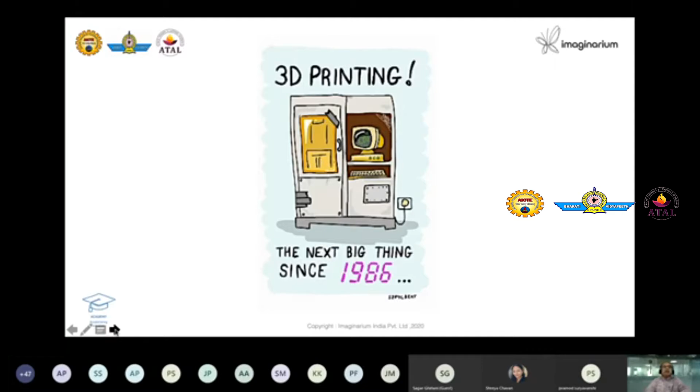So 3D printing, as you know, has been around for a long time. People keep calling it the next big thing since 1986 - it's an irony, right? And why is that so? That's because of some factors I've listed here: 3D printing is costly, you need a 3D file to print anything, it is time consuming, there are limited materials, and it always needs post processing. You cannot just 3D print and start using it. Many people say it is only good to make prototypes. These were somehow the reasons why people were not adopting 3D printing, and in a way, there is some truth in this.

But what you'll see in this presentation are case studies which will start changing these perceptions. When you say it's costly, you'll learn that it's not so costly. A 3D printing file is of course required, but people now have an ecosystem that supports this. Time consuming is also getting overcome - we are going to have technologies which are much faster. Limited materials were probably once upon a time the case, but today we have more than 600 materials to offer, not just from Imaginarium but generally available, including specialized materials. Post processing is something that is always there, which you cannot escape, so it is required. Today, we are happy to say that we are making end-user parts - it's no more only used for prototypes.

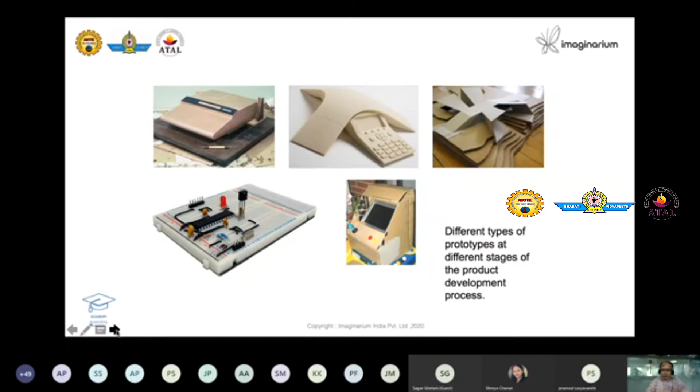People have been making prototypes using various ways, but that needed a lot of skill. In order to make these, you need to have hand skills. So many times you had to depend on somebody, an artist or a model maker, to help you out. Today, if you are able to generate a model on computer, no need to wait and request anybody. You just give it to a robot called a 3D printer, and that will take care of it, isn't it?

With the fast digitization happening in the manufacturing sector, we are looking at various ways the world is changing today. So we have seen industrial revolutions 1, 2, 3. And at the end of the third industrial revolution, 3D printing was born. Now we are stepping into industrial revolution 4, which is a very different kind of thing, we'll come back to it, but we are already moving towards industrial revolution 4. We call it industry 4.0.

3D printing brings the possibility of creating an object directly from a virtual model, and that is the beauty. Whatever you make right, it is produced. You make it wrong, it is also reproduced, faithfully. And that is the beauty of what you've been learning for the last 4 days about this technology, and this is what it offers.

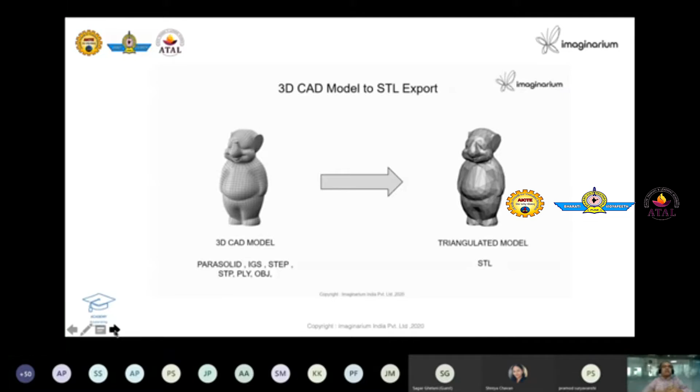We all know, if you have an idea, this idea as a sketch has to be modeled on a computer with a wireframe and all. Then you have to triangulate that model, and then you can give it to a 3D printer which prints it. A lot of file translations you have to do. You have to slice it, and 3D printing is that process in which the slices that are done are put back together, and what you get is the physical object.

And this is done using a 3D printer. What exactly will it do? It will put back the layers faithfully in a sequence in order to build the object that is desired.

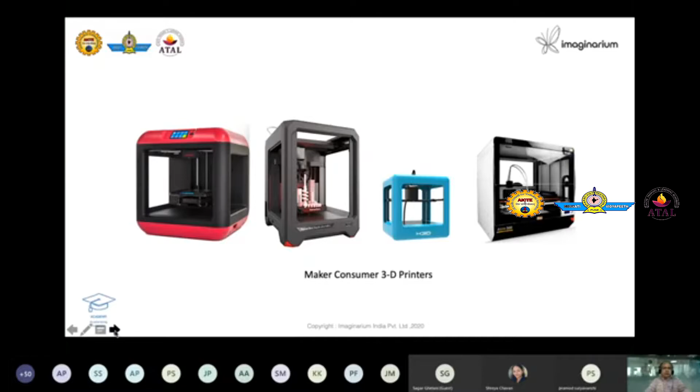Today you have a lot of small machines, big machines. This technology, particularly FDM, has become open source now. Your students can build, you can build. So we have a lot of machines today available, both internationally and in the local markets. And if we look at the whole spectrum of opportunity, first of all, 3D printing cannot be topped off without an idea.

So the idea is very important. Without an idea, what are you going to print? This idea has to be translated into a CAD model. For the CAD model, you have reverse engineering coming from the top, and also you need to have some knowledge of DFAM, design for additive manufacturing, because it is a new way of making things.

After having done the CAD, you have to export the file, and in various file formats, you have to process it, that is slicing and all. Then only 3D printing starts. Now, coming to 3D printing, it also needs material, and it needs a lot of care, that is maintenance. If you don't maintain them, they kind of don't work, so they need a lot of love and care.

Then, of course, you have post processing. What is post processing? It is like cleaning, painting, sanding, electroplating, for example in some cases, all of them, pigmenting. So these are all the post processing you can do. With this, what you have is a world of opportunity. You can think of anything, and even you can do unthinkable things. Let us come to that later.

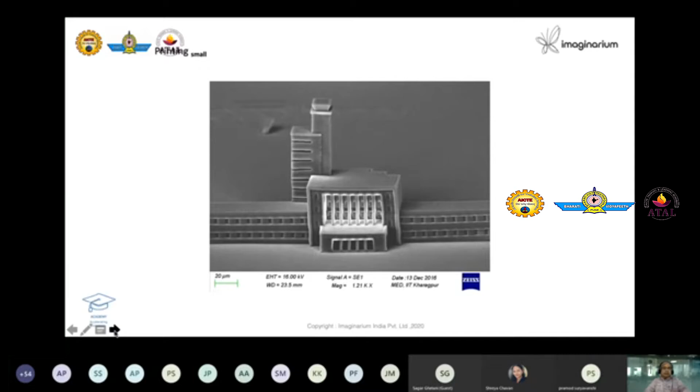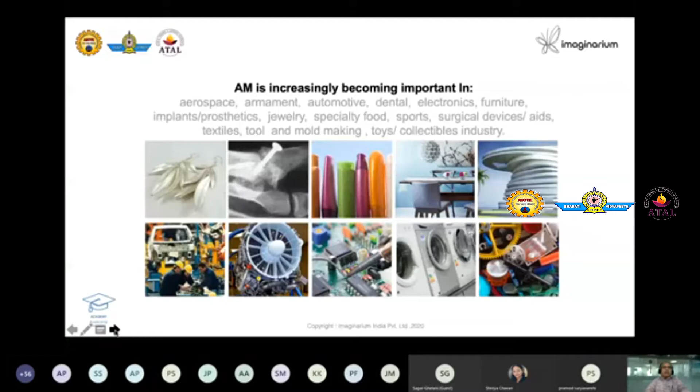Today, AM is making deep inroads into various industries such as aerospace, armament, automotive, dental, electronics, furniture, implants, prosthetics, jewelry, food, sports, and various other things. This is only limited by your imagination. It can enter into any field.

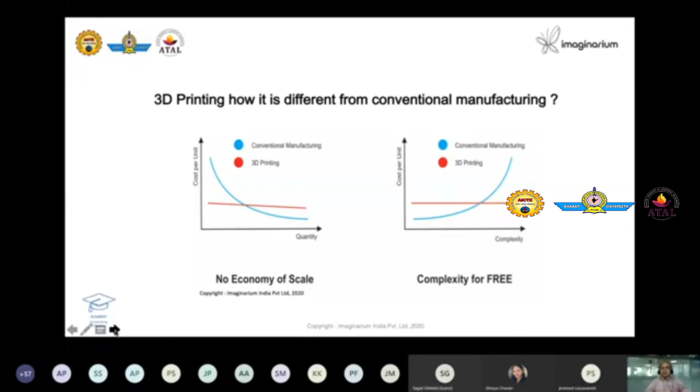People say there are two things which are spoken about when you speak about 3D printing's capability: there is no economy of scale, and complexity comes for free. So let us see through a small example.

On the other hand, in 3D printing or additive manufacturing, the part is built layer by layer and it doesn't follow the conventional way of setting. In one single setup, you can do all the things: knurling, milling of a square, and turning of round, all without requiring any fixture. So it is like toolless manufacturing.

You can see here the complexity - no matter how much the complexity, the cost curve remains steady. It is a horizontal line because it doesn't demand any extra wastage or incur any extra cost. And what is happening to the wastage? It is not much, because you're adding material. So I think these are very important aspects when we go into the application areas.

Now, coming to the world of important applications, I can think of many of them, but predominantly, if you prioritize, we have six of them. They are part consolidation. What is meant by part consolidation? In earlier days, we used to have a box.

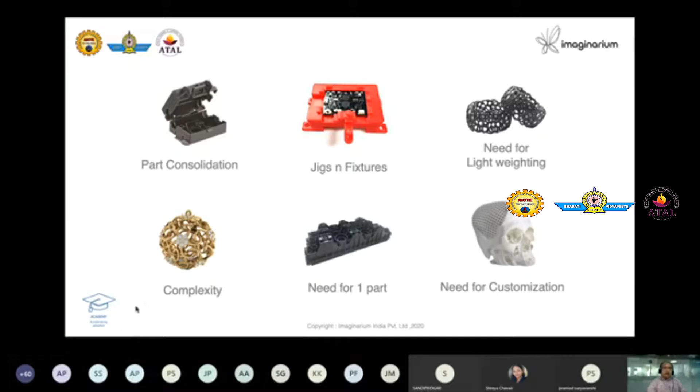Moving forward, we have one example here - GE's LEAP engine fuel nozzle. You can see part consolidation here, from 20 parts to one part, because of which the reliability is increased by 5 times. Weight has reduced by 25%, and it has become more cost effective, 30% more cost effective.

And whenever we require, we can print this on demand. You just have a digital model of this, keep it, so that doesn't require any inventory carrying cost. So you're able to save on the inventory cost. This is kind of giving a great message to the world - these are the capabilities, please adopt additive manufacturing.

Let us call a spade a spade - 3D printing was born for making prototypes. So you can see some of these prototypes even today. World's largest consumption for 3D printing has been in new product development, in making prototypes, in research, in understanding things. So take any sector - this is one of the main areas where 3D printing plays an important role.

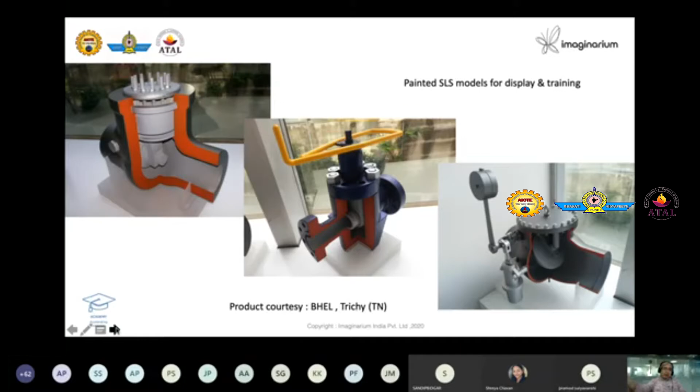But wherever you have the facility, you can print it. And that is also why people have transported a 3D printer to space, in the International Space Station. They are keeping 3D printers today - if they have any problem to fix, they can just transmit a digital model, and that digital model gets printed over there. There are other case studies like this one.

This is an engine block which used to take 300 days - from drawing to carpenter carving it to core box creation. It used to take 10 months straight.

Today, in 4 days, this can be made available. So this is a wax model. After checking, it can go for casting directly to get an engine block, and that's a phenomenal saving of time. Many people don't know about this. This is made up of nylon, done by sintering. We infiltrate wax into it, and after the wax is infiltrated, the whole part is 80% wax and 20% nylon, and it can be burnt out, and you can pour anything in this.

So such is the beauty of this. We are going to study many case studies now before we see the factory. Since you're all from institutions, I am showing this. These are all made for Formula Car students' projects.

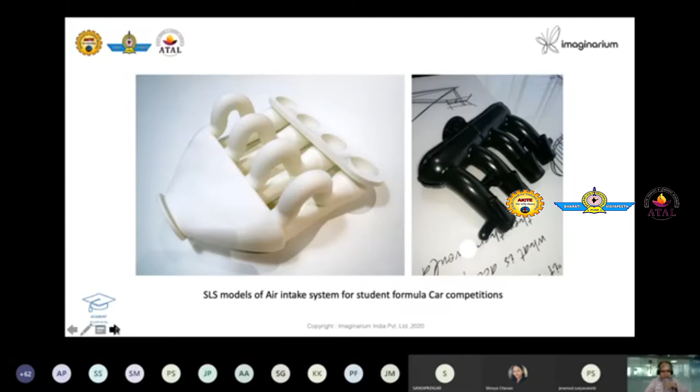These are some products which are not made in large numbers. They are IoT devices, made for a company for 10, 20, 30, hundreds only. They test and then go for bulk, they'll go for tooling and all. So we are able to do this much faster thanks to the technology.

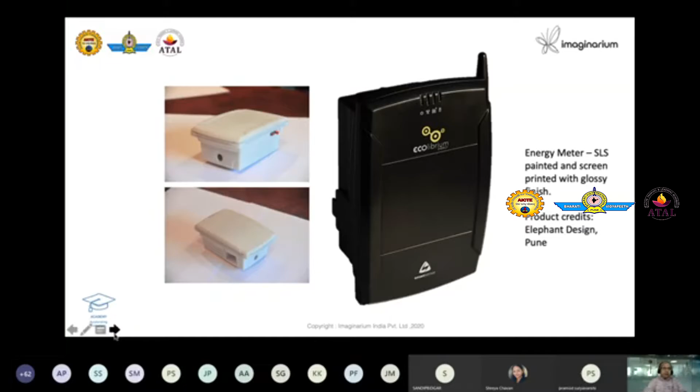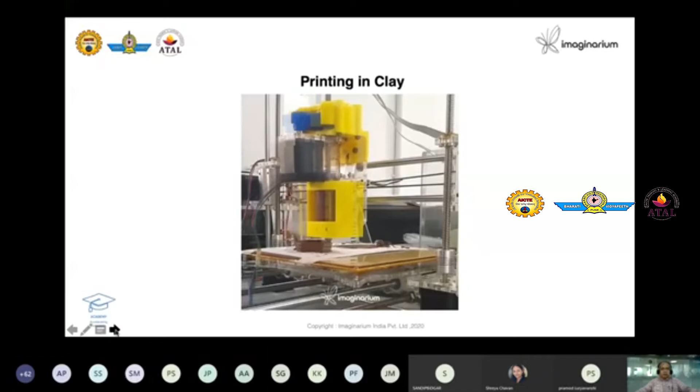We also tried making a clay printer, so these are some of our own R&D - clay, ceramic, and food. These are all the things we have tried. This will kind of open up our horizon to offer services to various things, such as these.

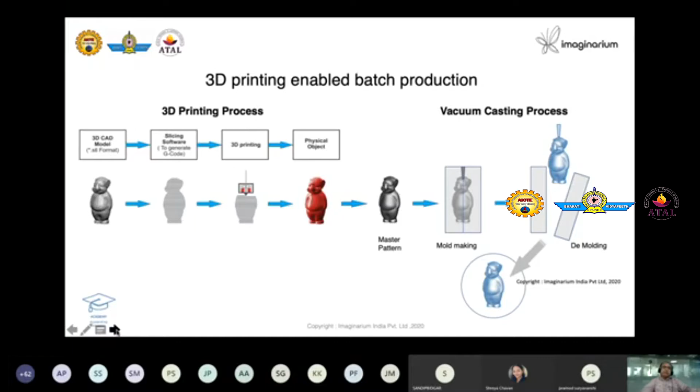We can also do 3D print enabled molding for small batch quantities. After 3D printing is done, you make a master, and that master you put into a mold, a silicone mold, and then you cut it open. You get a cavity which can behave like a mold for the production of a small batch quantity. So we are able to do transparent things, opaque things, things with different hardness, from 10 or 15 shore hardness to 90 shore hardness. We can have rubber-like objects also from this technology.

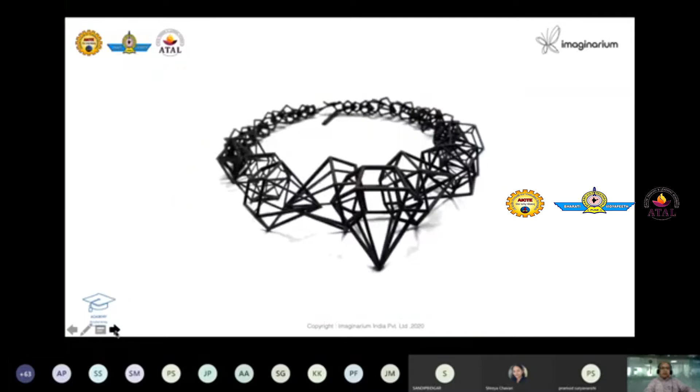You can see the jewelry is no more just a piece of gold. It can have fun, you're wearing a statement. You can see how beautifully people are able to visualize, conceptualize, and then make it. And it opens up a whole lot of things - you can see here the fluidity of the cloth is captured.

If we really look at it, you need a new design thinking. We need to go for customization as far as possible - then 3D printing becomes a real value add. Need for small batch quantity, even one part, is another opportunity. And optimization of structures and parts can be done using 3D printing. You can actually think of a value delivery - it's not about just product delivery, but value delivery that happens.

Design will lead the consumption, manufacturing would be taken for granted. Who worries about whether something is 3D printed or not? People want to enjoy products and services, that's it, right? And the future of 3D printing is going beyond prototyping to end user parts. In fact, as we discussed, we are making a lot of functional parts which will go for end user application.

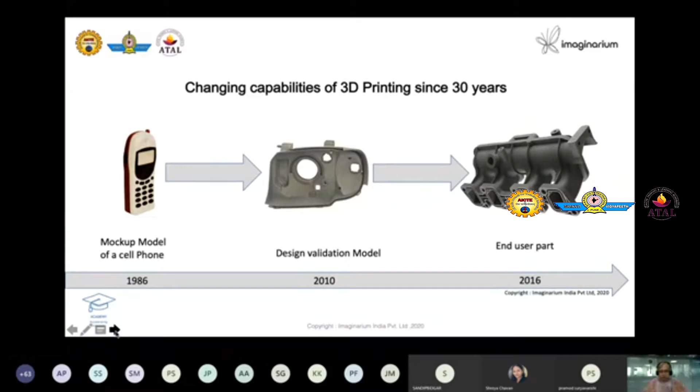So the journey goes on, the technologies are becoming cheaper and better, and more material is at your disposal. The ecosystem on the whole is really improving now. You can see some technologies like multi-jet fusion brought by HP, Hewlett Packard, that show a lot of promise.

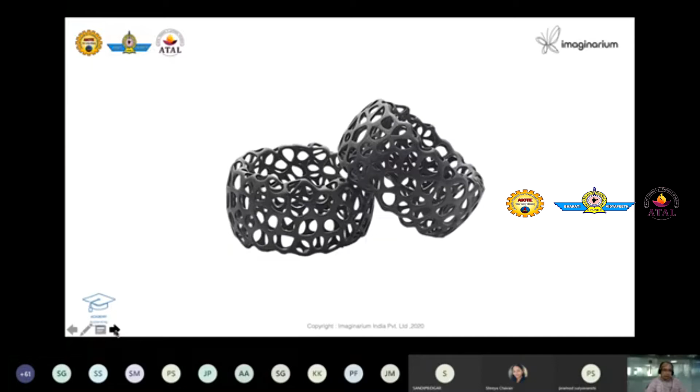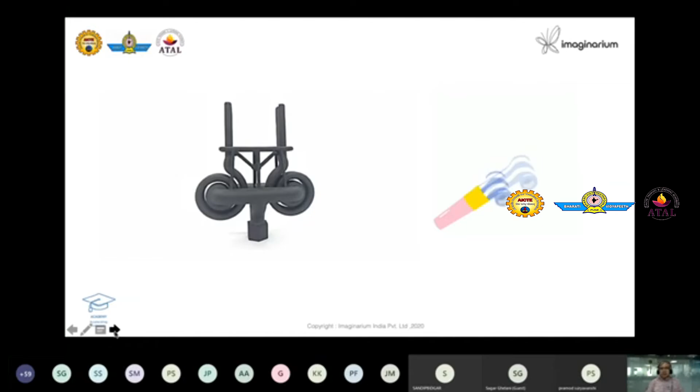I'm showing the blower which is used in birthday parties - that's how this works. Let us see the working of this. You can see the pneumatic system brings the compressed air, and that deforms, and the tongs come and close.

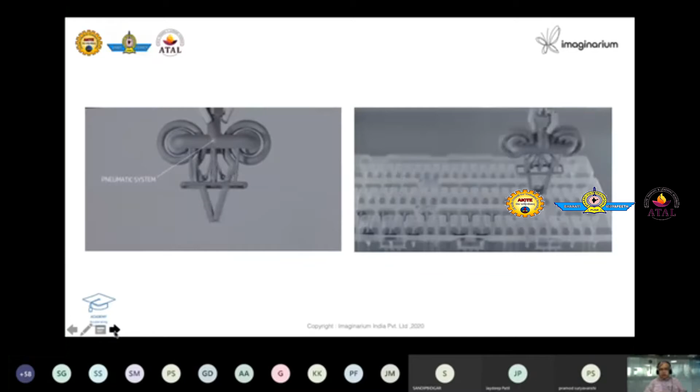You can see the application, how parts are lifted and transported from one row to another. So these are some of the compliant mechanisms. I will not go deep into the details, but these are some of the best adopted using this technology. People create things which will last forever - the part you see here will live for a very long time because the number of parts is just one. The whole part, though there is a mechanism which is working, the beauty is it has just one part count.

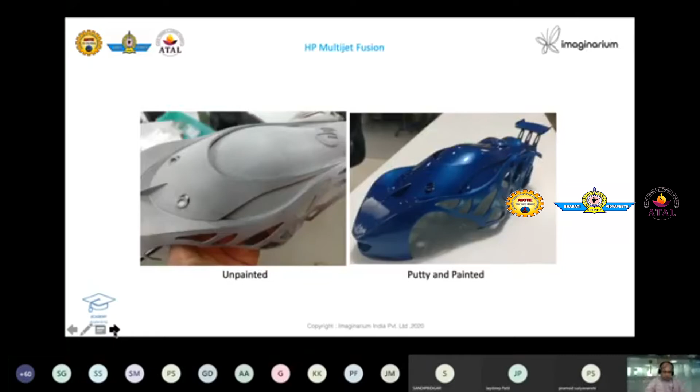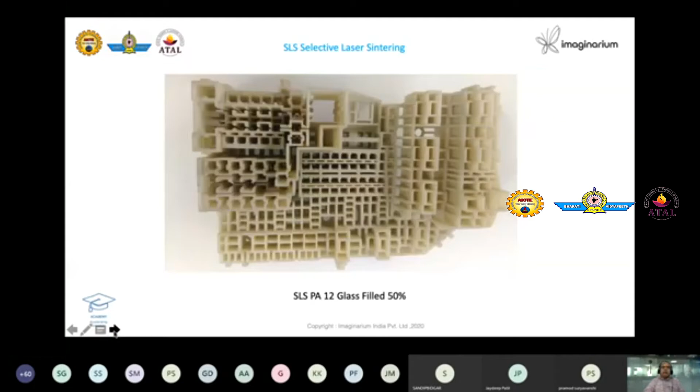So we do a lot of projects with automotive - you can see some of the automotive products. This was a pattern, impellers and all. And here you have a complex part which is done using SLS - these are all made up of glass filled nylon. These are dielectric parts for the electrical industry. Here again, a bevel gear part is made in small quantities, and the option was only 3D printing.

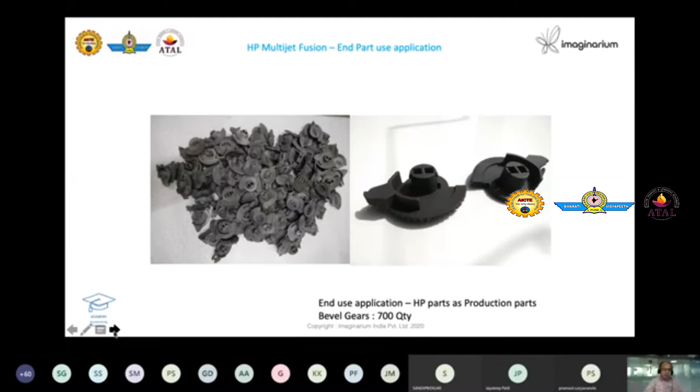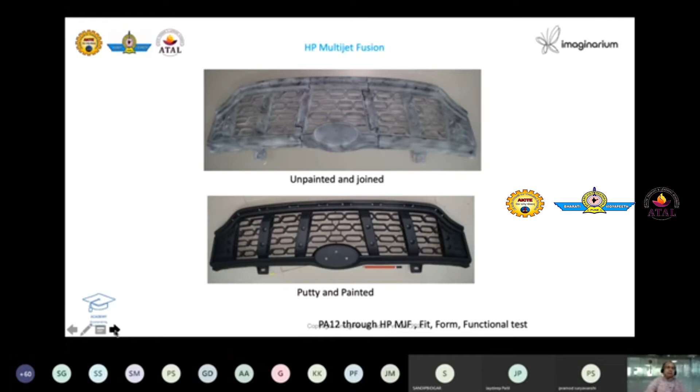So these are some of the other materials we have been using. Nylon PA6 can be directly sintered, and it gives very good engineering plastic parts.

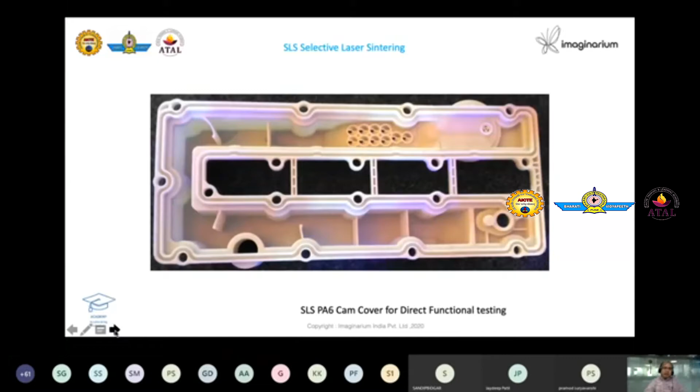This is an SLS part. Of course, it's quite a huge part, and some 12 or 24 pieces are put together to make a large part which is required. You can see here some of these are mirror optics, mirrors for automotive systems, which can be printed and then plated or metallized.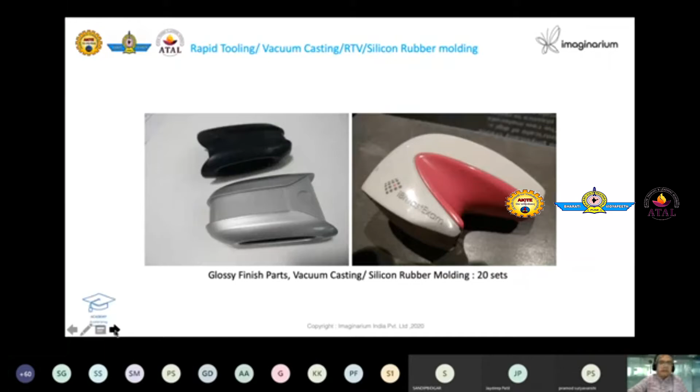You can see here some of the automotive things printed and then converted into silicon molds to produce batch quantity. So these are all indirectly produced using 3D printing.

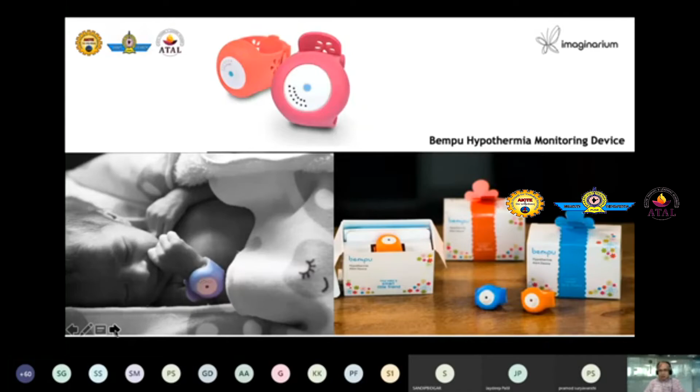This is a BEMPU hypothermia monitoring device, an idea that came to us from the startup BEMPU from Bangalore. We could create this skin-friendly, infant skin-friendly material for the band, which was vacuum cast. Today they're able to make a lot of it, and they're saving a lot of children.

In medical opportunity, whatever X-rays you take, it's normally CT is a set of slices. So people thought, why can't we use it for 3D printing? Because 3D printing also is built layer by layer.

So using some medical image protocol like DICOM, it can be imported into a software wherein we can stack them in a sequence and we can get back the anatomy. So that is the potential this opened up.

And today we have medical opportunities spreading to 5 different levels. At the first level, you have devices. At the second level, anatomical models. At the third level, you have guides and fixtures required for the patient, and then implants. And at the fifth level, you have printing of organs.

So printing of organs happens at different levels - on a petri dish, people grow something and they graft it and use it. Today this is still going on in labs all over the world, and people are not quite able to do the vascularization, and that's what is holding back the last stage.

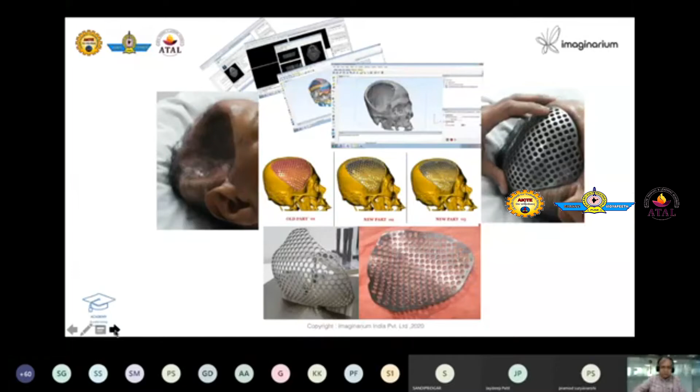There's a teacher called Darshana ji, and there's a movie on this particular thing - she also got a cranial plate, and it is a very good representation of how technology can change our lives, change the quality of life, and improve and save lives.

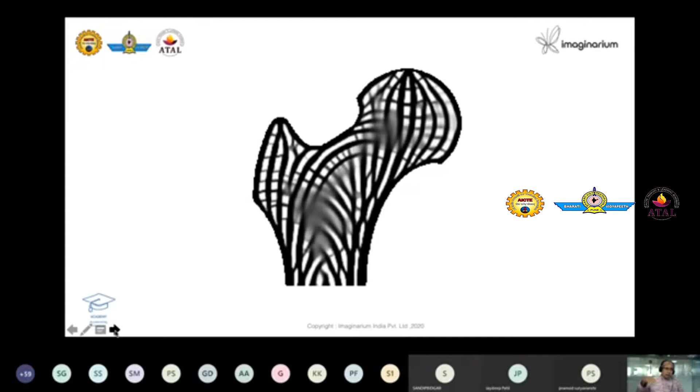You can see this is a human bone - if you cut them, you see a lot of porosity inside. These are called functionally graded materials. Because in 3D printing, you have control over every layer, you can play with it and get any complex structure made.

Now coming to the COVID time, we all know COVID brought up some of the strong points of additive manufacturing, such as conceptualizing, making quick prototypes, and then launching it. All these are very much part of the present crisis.

And I'm able to reach all of you by this virtual means because of the one thing that is COVID. So in some sense, we should thank COVID because it has brought in digitization much earlier than what was earlier thought of.

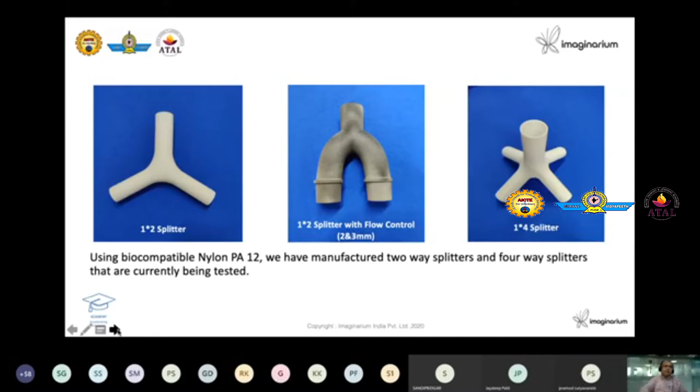These are splitters for ventilators that were made on call by doctors, and it was very effective that they were used, actually with the systems to check the efficacy and then also possible reuse on the patients.

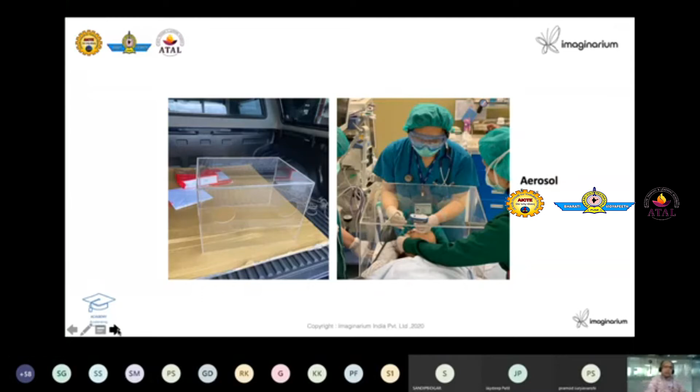The Venturi valve again, printed for healthcare. You can see here, aerosol box is a fabricated one, and it is a kind of control volume, when you have mass and heat transfer, you have a control volume. Same way, here, this constitutes a kind of boundary for heat exchange.

That is very important. You can see here some of the devices which people have been making, surgical mask to relieve some of the pressure. They have built a small thing. The beauty of 3D printing is you have an idea, it can be made into an artifact quickly.

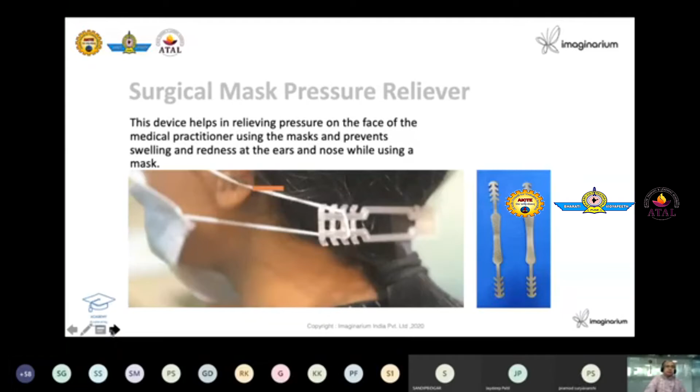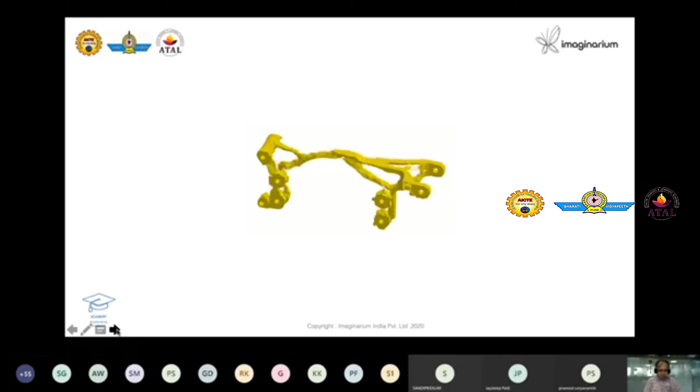Same way in buildings also, people use a lot of parametric designs, lightweight, which are 3D printed, that can be deployed on big, large facades. So if the sun is there, it's too bright, you can close it. If sun is not there, it is too dark, you can open all of them. Something like that is a possibility.

The future of 3D printing is hardware and software. Material and software will keep growing, in order to move from a physical factory to a cloud factory. Very important. You can see material, the hardware will become like generic, like generic drugs.

Hardware will be treated like a screwdriver. You don't study screwdriver now. As a mechanical engineer, do you study screwdriver? No. So same way here, 3D printer in the future, people will probably not study because who cares? I'm interested in the end part, something like that.

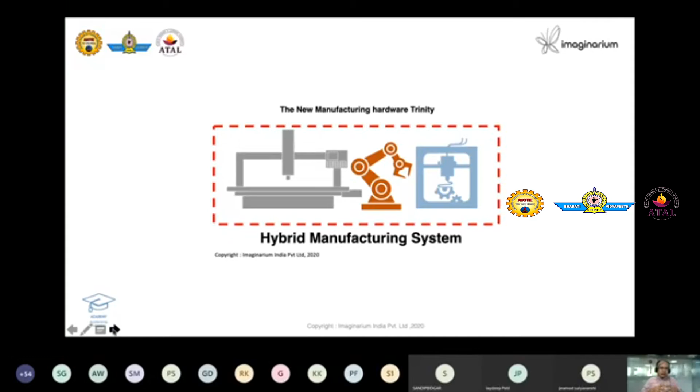In future, there is going to be hybrid manufacturing, wherein the CNC strength, additive manufacturing strength, and robotic strength are combined together to get a kind of solution. These guys are going to have it, we're going to see. You can see additive manufacturing or 3D printing is an important player in Industry 4.0, which brings the physicality to cyber physical systems.

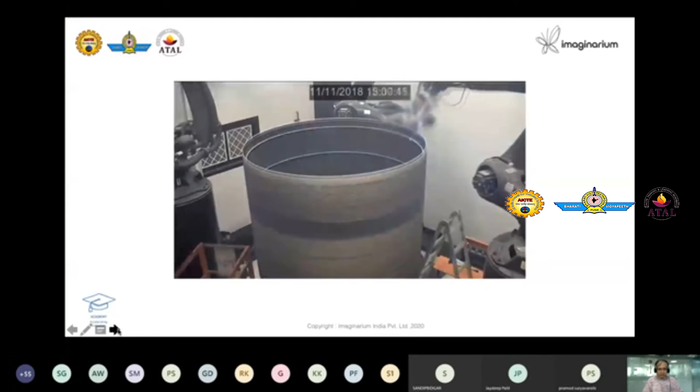You can see here from SpaceX, competitor Relativity. I'm sorry, Relativity made this part, and you can see the complexity, the size, the accuracy, all that.

Now, in this, it's very important to learn where exactly 3D printing actually lies, before we go into virtual reality, virtual tour. I would like to have this last slide wherein you have the 3D printing, which is something that delivers complexity. You can see volume wise it is very poor.

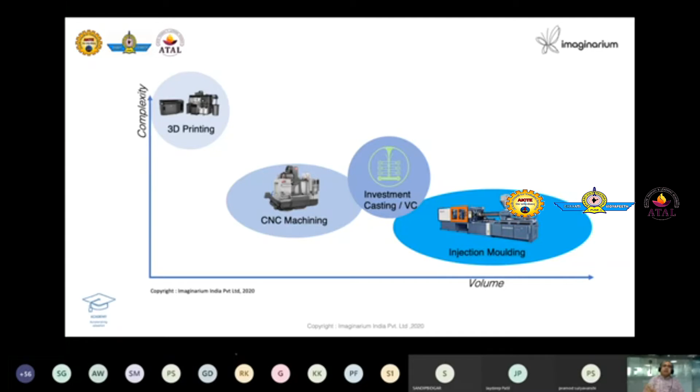Injection molding will remain as a high volume production methodology. 3D printing will remain as a complexity producing technology. I cannot possibly print a washer. Why do I need it? Because the conventional method is good, it fetches you a washer very easily. Whereas if you go for 3D printing a washer, it's a very wrong way of utilizing its strength. So please understand, 3D printing should be used mostly for complexity.

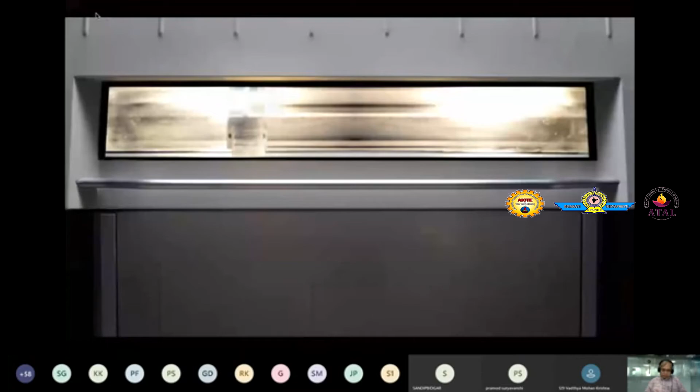Why even try and make the impossible? Because there's never been a more exciting time to be alive, to imagine, to create, to change things, to build better objects, better ideas, better businesses, better lives, even a better world. The India of yesterday was of cheap labor and efficient manufacturing. Our dream is an India of tomorrow, which is of creativity and design. Imaginarium is our way of helping unlock the creative talent of our country.

3D printing is a set of different technologies that allow the creation of objects by deposition of material layer by layer. This approach to manufacture objects has enabled bringing fragile ideas to reality quicker than ever before. Today, 3D printing technology has become a very powerful tool in the medical domain, for medical device innovation to surgery planning.

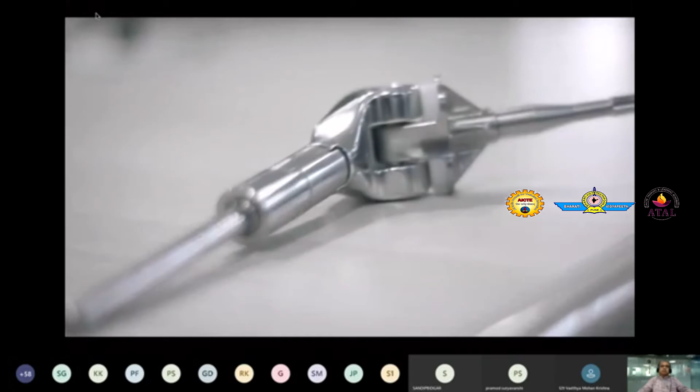We create the solution in CAD first. Doctors want to be able to see it in 3 dimensions to check the design form, fit, and function, and then give us their feedback. Using that feedback, we are able to reiterate, change the design, and make new models. This whole cycle time is compressed to a few days instead of few weeks and months. Previously considered impossible designs are now being realized every single day in huge numbers all over the world.

And now it has come to a stage where we can have desktop machines. It's almost become a home craft to make rapid prototypes. It's going to rewrite total manufacturing engineering and all our manufacturing processes. What we are talking about, assembly of many parts, the whole thing will change. Yesterday's science fiction is today's innovation and tomorrow's way of life. Converting digital bits into atoms and atoms back into bits is now a click of a button. And here we are at Imaginarium, bringing this next industrial revolution to the desk of every inventor, designer, tinkerer, and artist.

There are only a few technologies that change the way the world runs. Every single day, in every single way, we are reimagining the world and its businesses. We are collaborating with them to achieve their greatness. Just in a matter of hours, you can have your imagination, your dreams, your blueprints right in your hands. Because we believe the world's best ideas need its best builders. Imaginarium is the oxygen that brings these ideas to life. And with every idea, we make one less thing impossible. We are where the best in 3D printing meets the best in human imagination.

What we are making, you can't make any other way. What we are doing, you can't do anywhere else. Our work is our signature, and it is traveling across the world. We are Imaginarium, building awesome stuff that matters, India's largest 3D printing company.

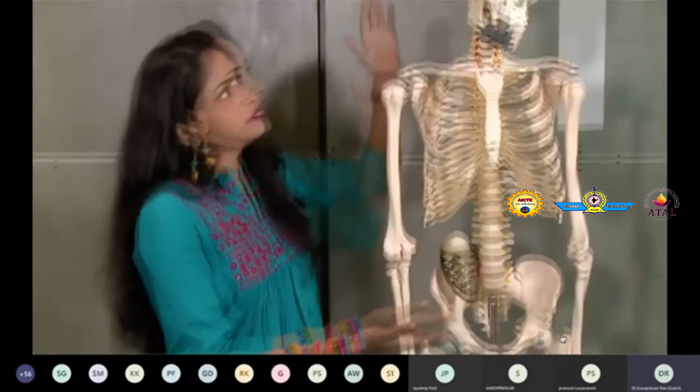और इतना ही नहीं, 3D प्रिंटिंग की मदद से हम पेशेंट स्पेसिफिक मॉडल्स या इम्प्लांट्स को भी तैयार कर सकते हैं। जैसे आप देख रहे हैं कि ये एक मॉडल है किडनी का, जिसके ऊपर ये एक ट्यूमर दिखाया गया है। ऐसे मॉडल्स यूज होते हैं मेडिकल स्टूडेंट्स को पढ़ाने के लिए, डॉक्टर्स अपनी स्टडी के लिए इसको यूज करते हैं। साथ ही जो यहाँ पर आप एक इम्प्लांट देख रहे हैं, अगर कोई इंसान किसी एक्सीडेंट में अपना शरीर का कोई हिस्सा खो देता है तो वो हिस्सा हम 3D प्रिंटिंग की मदद से बना सकते हैं। ये टाइटेनियम का बनता है।

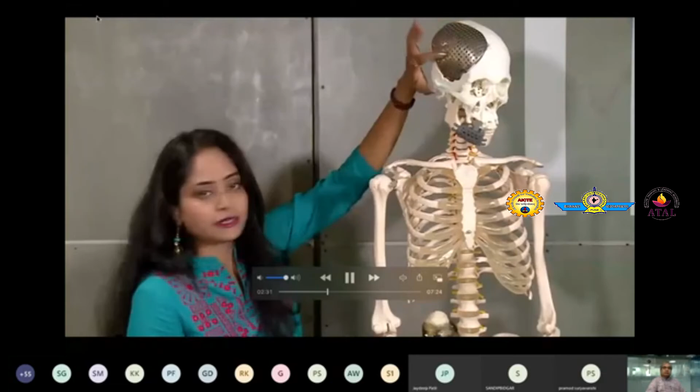और ऐसी ही एक कहानी आज हम देखेंगे दर्शना की, जिन्होंने एक एक्सीडेंट में अपना सर का एक हिस्सा खो दिया था। तो कैसे 3D प्रिंटिंग ने दर्शना के उस हिस्से को बनाया और उनको एक नया जीवन दिया।

तो मिलने के लिए दर्शना की, तो रास्ते में किसी बाइक वाले से उसका एक्सीडेंट हो गया। एक एक्सीडेंट जिसने दर्शना जी की जिंदगी को पूरी तरह से हिला के रख दिया। बाइक से टकराने के बाद उनके सर का एक हिस्सा पूरी तरह से टूट चुका था, जिसे दोबारा पहले की तरह जोड़ पाना मुश्किल था।

मेरे सर पे खड्डा जैसा हो गया था और जैसे बच्चे का तालू होता है ऐसा फॉर्म हो गया था। इस परिस्थिति में रहना दर्शना जी को गवारा नहीं था और वो हारना नहीं चाहती थी। और वो कहते हैं ना कि जहाँ हौसले बुलंद हों, रास्ते मिल ही जाते हैं। उनके पति की दिन रात की कोशिशें उन्हें ले आई इमेजिनेरियम, जहाँ 3D प्रिंटिंग की मदद से सर के उस खोए हिस्से को बनाना एक हद तक मुमकिन था। लेकिन ये रास्ता भी इतना आसान नहीं था।

इसमें सबसे बड़ी डिफिकल्टी ये थी कि डॉक्टर्स के लिए भी ये कटिंग एज है, एकदम नया है। तो डॉक्टर्स को पता नहीं था कि ये कैसे यूज कर सकते हैं, क्या क्या एप्लीकेशंस हो सकते हैं। तो डॉक्टर्स को कन्विंस करने के लिए, उनके परिवार वालों को कन्विंस करने के लिए कि ये बेटर टेक्नोलॉजी है, कन्विंस करने में थोड़ा टाइम लगा। और दूसरा था कि डॉक्टर्स डिज़ाइन फील्ड से नहीं आते और डिज़ाइनर्स मेडिकल फील्ड से नहीं आते, तो इस कम्युनिकेशन के लिए हमें थोड़े ट्रायल्स और एरर्स करने पड़े। पर 3D प्रिंटिंग का वही एडवांटेज है कि एक मिस्टेक करो जल्दी सुधारो, मिस्टेक करो जल्दी सुधारो।

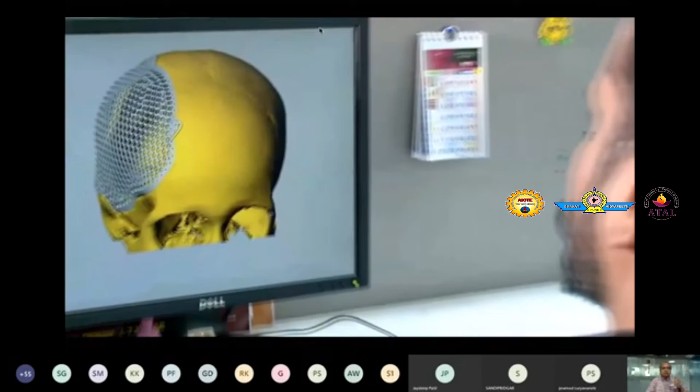पेशेंट स्पेसिफिक इम्प्लांट यानी जैसे आप टेलर से अपने नाप के कपड़े बनवाते हैं, ठीक वैसे ही 3D प्रिंटिंग की मदद से दर्शना जी के सर के उस टूटे हिस्से के नाप के हिसाब से उनका इम्प्लांट डिजिटली तैयार किया गया। जब हम लोगों ने पूरा केस स्टडी किया तो जो उनका स्कल का पीस टूटा था उसके बाद का सीटी स्कैन मंगाया।

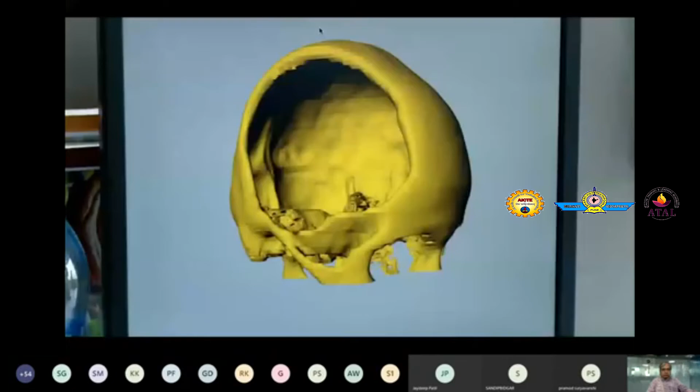उसके बाद हम लोगों ने वो सीटी स्कैन डेटा का 3D मॉडल बनाया। तो उसके लिए हम लोगों ने एक सॉफ्टवेयर यूज़ किया था जिसमें हम लोगों ने ये सीटी स्कैन डेटा यूज़ करके उनका एक 3D मॉडल बनाया, ऐसे डिजिटल 3D मॉडल, जिसकी वजह से हम लोगों को उनके स्कल में जितना गैप था वो उसके एग्जैक्ट डिमेंशंस मिले। वो डिमेंशंस को हम लोगों ने यूज़ करके फिर एक इम्प्लांट बनाया जो सिर्फ उनके ही डिफेक्ट पे फिट होगा।

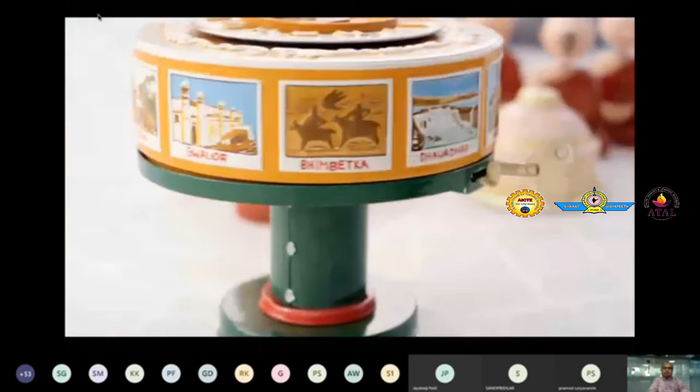That is the making of a trophy for 26/11. It has got very low sound actually, so probably you can see how the CAD is made. This is the making of the CAD, this is printing, SLS printing.

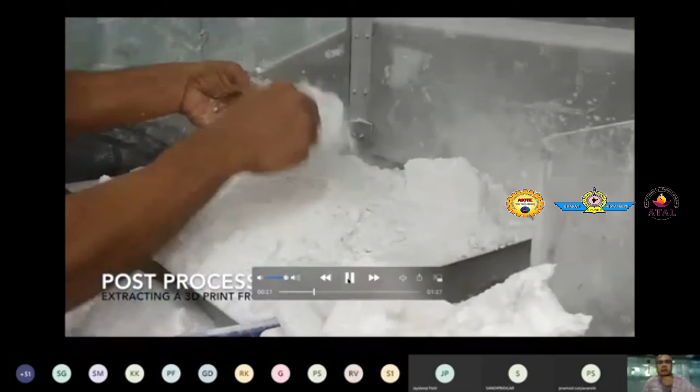After printing, taking out the parts from the powder, you can see the part which is sintered is so strong, and you can see the powder has to be removed, and this is all finished parts under inspection.

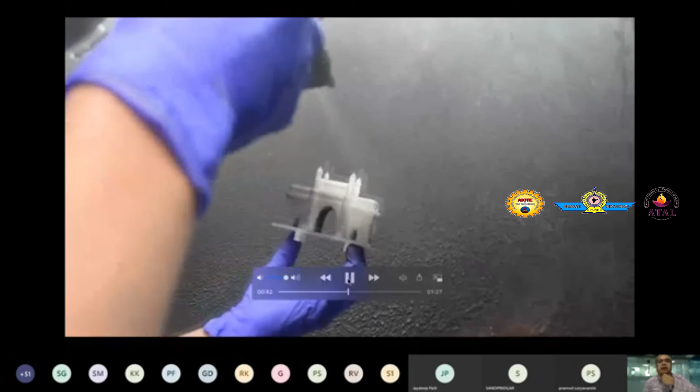Then we do the spray painting of each. This is Gateway of India, and these are all bases which are made by hand, not actually 3D printed, because it doesn't add value.

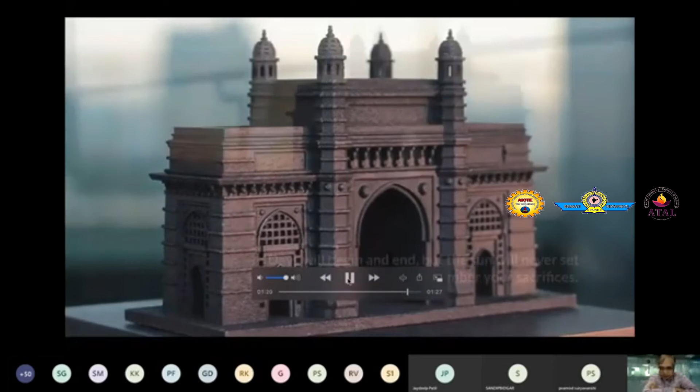And you can see the part is being put on the pedestal, which is the 26/11 Memorial Day trophy. I was there, and the Chief Minister at that time, Fadnavis, was there, and it was all issued to people.

I'll share yet another thing for you to check out.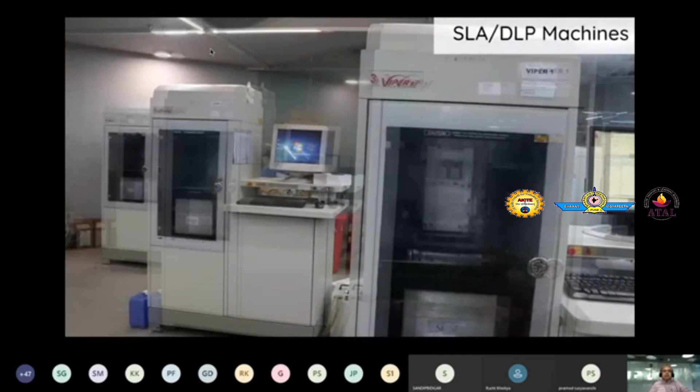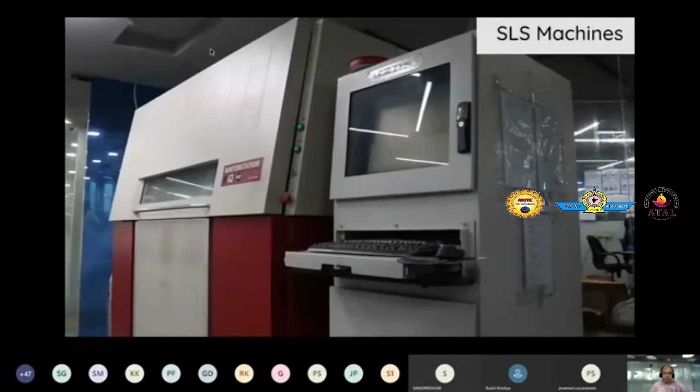What you see here is the SLA machine Viper SLA, and it has not changed since the time Chuck Hull discovered it. You also see a large machine iPro. These are all multi-jet modeling MJM machines. And you can see this is a Sinterstation, which is SLS technology. And what you see here is HP's multi-jet fusion technology, multi-jet fusion, and this gives you end user parts.

Spectacles and all we can make. And then we have a vacuum casting facility where we can make quick molds overnight, and people can see demolding is done. This is pouring of resin into the mold, and this is called mold packing using staplers. And then you can see they have opened the mold, demolding. The part is taken out, and it needs cleaning and all.

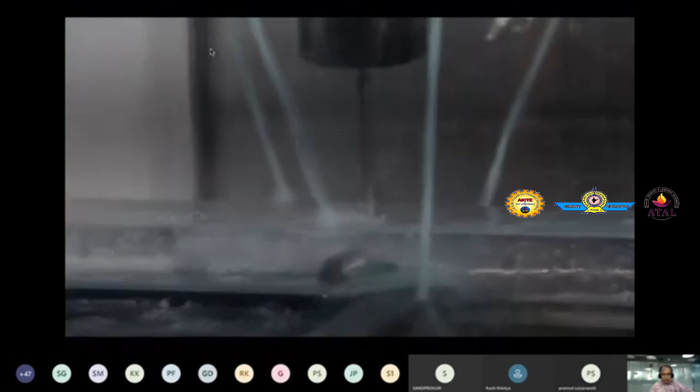This is the CNC shop where we do tools and all. Even some prototypes we do by subtractive manufacturing also. And then we sometimes make laser cutting of parts as required, because we have got all types of facility under one roof. Then we have injection molding where parts can be built quickly, and whenever we need something like 500 to 1000 to a lakh parts, we use injection molding.

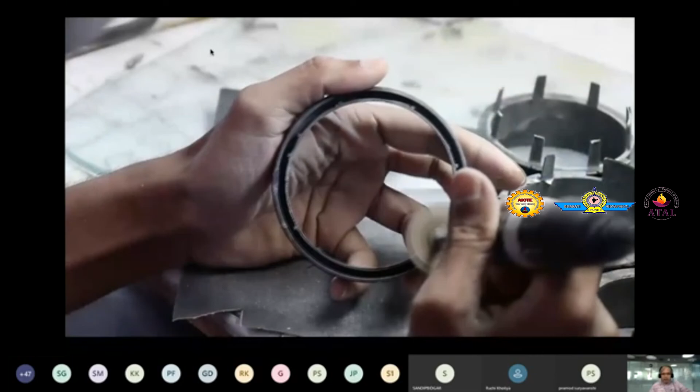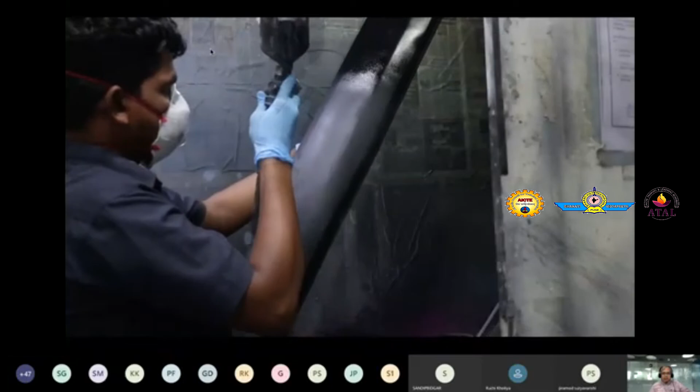The finishing shop. So every part which is 3D printed has to be subjected to post-treatment: putting putties and cleaning, buffing, sanding. They're all done. We have highly skilled workmen. Totally there are about 350 people in Imaginarium. And you can see it's a computerized color synthesis; we can have any color made by mixing those with the help of a computer. This is spray painting, and then we have plating also.

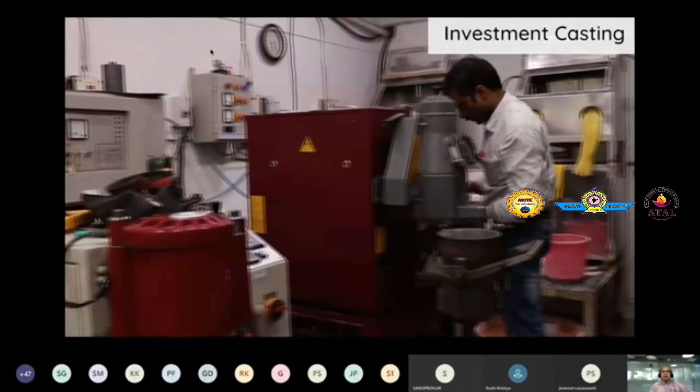In the jewelry unit, we have a highly advanced CAD facility where people are trying to make entities virtually, and then they're all printed in wax, and then we make it into a tree. So you can see many parts will go, and after investment, those molds are cast with metal such as gold, silver, brass, bronze, using vacuum casting.

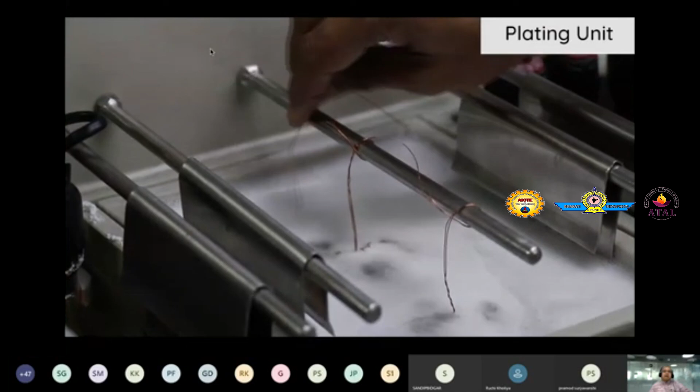You can see the Karigar trimming and working on the part. Now he's laser welding it, using a microscope, welding joints here, and doing inspection of a part. And this is enameling; so enameling is being done using colors. This is plating. Of course, we plate very small parts, so we don't require the large tanks.

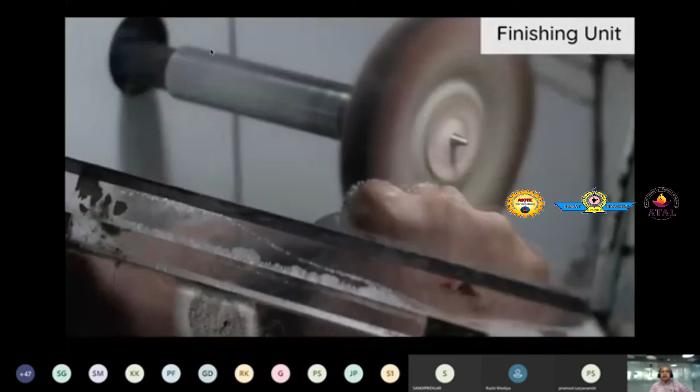Those large tanks are there; they are very small. We don't require them for very large plating; we take it outside and give it to vendors. This is buffing of a jewelry part. Let's see how it is finished. This is the final touch, called buffing.